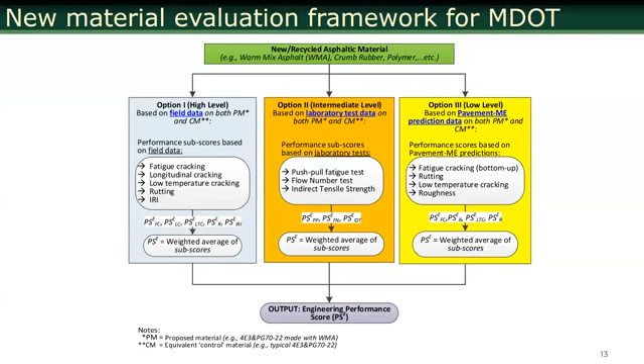So how do you address that? What we did is, okay, control material—you can still compare against control material, but we're going to run a whole bunch of tests on typical MDOT mixtures. So we ran typical MDOT mixtures, flow number, beam fatigue, those kind of data, and we come up with some kind of a baseline. So you compare against your control, but also at the end compare against the baseline mixture that shouldn't be too far off from a typical MDOT material. That's how we did this analysis.

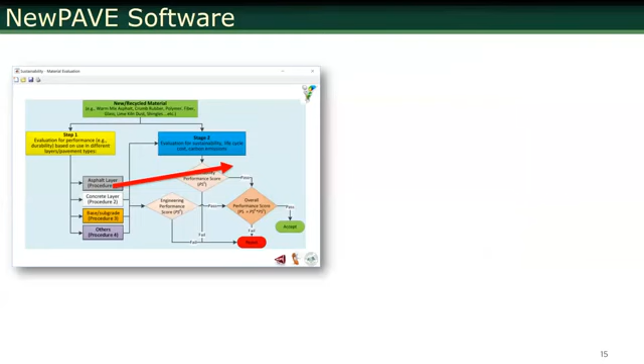Anyway, so after the performance analysis, then what we have is this asphalt layer. If you look at this, the way it goes is once you run the pavement ME, you have predictions of fatigue cracking, thermal cracking, and rutting, and the performance score is calculated and analyzed based on all three.

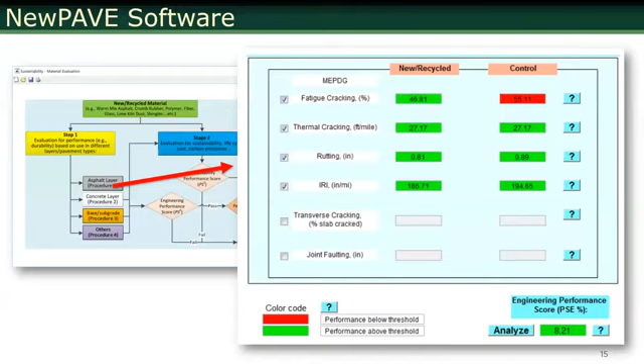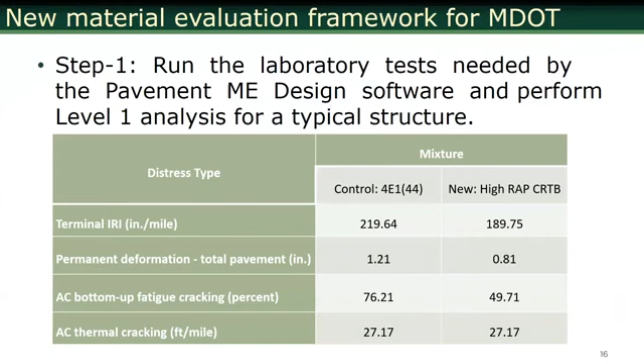The way it works is like, here's an example. Let's say you run laboratory tests by the pavement ME design for level 1 analysis, and let's say you got these numbers. Then your performance score is based on the distress of your control material minus the distress of your proposed material, divided by the distress of the typical MDOT mix.

So this is essentially your performance score. And these typical distresses for the MDOT mixtures—we come up with some distresses for typical structures, a few typical structures, and this is how we come up with that performance score.

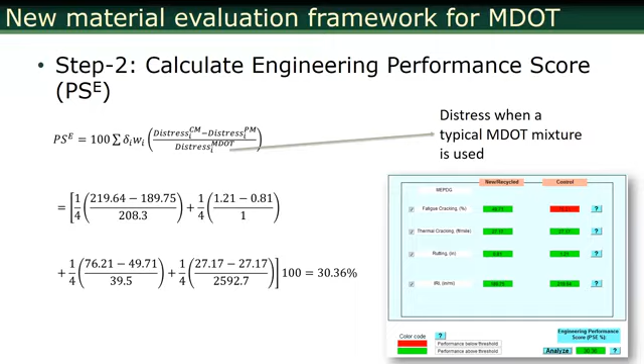And once you get a performance score, then that performance score goes into the life cycle analysis in phase 2. And that phase 2 life cycle analysis is really based on present value analysis. So let's say if the proposed material has a performance score of 50%, meaning it's 50% better than the control material.

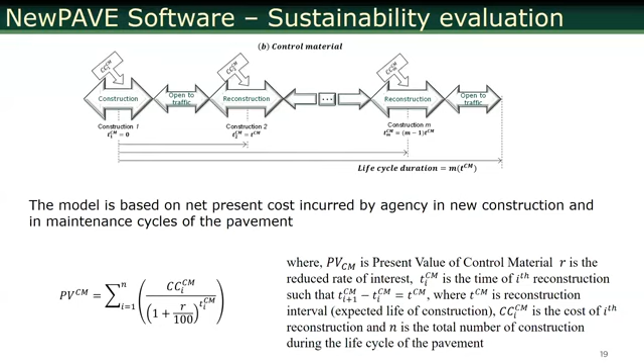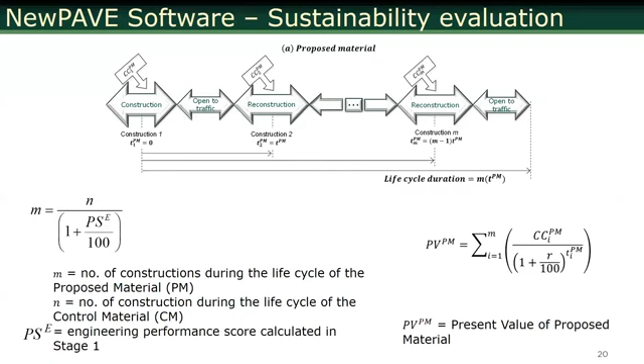So you look at, let's say, a 100-year life cycle duration, and see how many times within that 100 years you would do a reconstruction, and start calculating the costs of reconstruction over 100 years, how many times that's going to happen. The proposed material, depending on how much better it is, for a 100-year period, you will have maybe fewer reconstructions. Because of that, you calculate a present value, and you compare the net present value of the proposed material against the net present value of the control material. All this is based on Pavement ME analysis.

Eventually you get an engineering performance score and a sustainability performance score. Sustainability isn't just cost, there are also environmental effects like carbon - it's quite lengthy to explain everything. But the bottom line is, PME is a key engine in evaluating a new material and deciding whether to use it in pavements or not.

So when you look at a performance score of 8, what you're seeing in this particular example is essentially saying, overall, considering sustainability, life cycle cost, and performance, the new material is 8% better than a typical material. So it's good, it's not worse - you can try it, maybe it's going to work. Remember, this includes the cost and everything, so you shouldn't be asking about the cost, because it's in there - that's life cycle cost. The initial cost, the reconstruction, everything is in there.

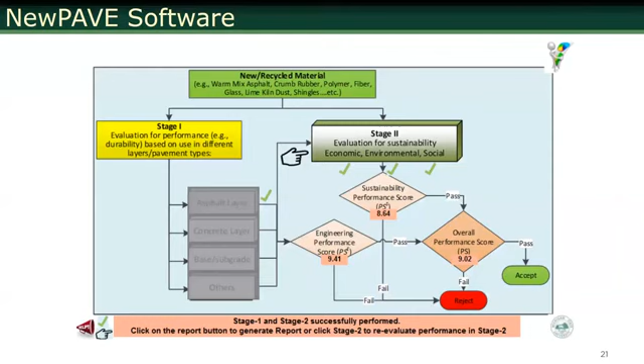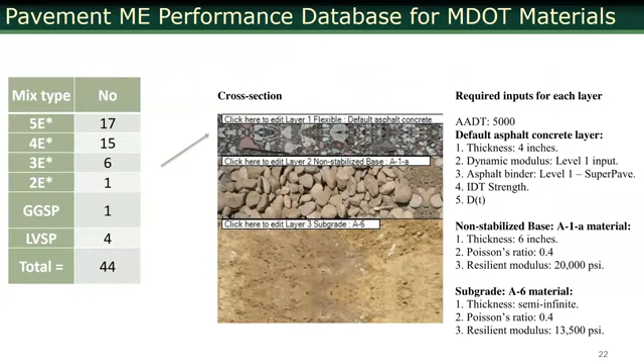While developing this software, we looked at one of the structures, evaluated multiple different mixes, ran a whole bunch of tests, and ran simulations on this type of structure. There was a 4-inch thick asphalt, and we kept varying the mixture type on this 4-inch asphalt, and we saw some interesting results. Again, this was a very limited study, not very extensive, and there's really no guarantee that 9% better is going to work in every single project, structure, and climate. So it's just an initial pass/fail type of analysis, but this is an interesting slide, I believe.

So we just grouped - we analyzed 44 mixes and grouped them based on design ESALs, these are 4E1 through 4E3. And what we've seen is for rutting, there's some variability here, but typically as you go higher in traffic level, you get less and less rutting, which is kind of expected. As you go to higher traffic level for 3E mixes, you get less and less rutting.

And for 5E mixes, you get less rutting from 3 to 30 mixes, but we got some unexpected results from 0.3 to 3 mixes - we would have expected them to have more rutting than the others. But perhaps in this particular case, the binder effects are dominant. Remember, when you go from E3 to E30, as you increase the ESALs, you're really having a lot more interlocking and a lot more compression between the mixes. So the effect of that is shown here, but at lower interlocking levels, perhaps the binder is overcoming and there's not excessive rutting, which is good. That also shows that the overall Superpave system is working pretty well - the PG system is really not allowing excessive rutting, the binder property overcomes it.

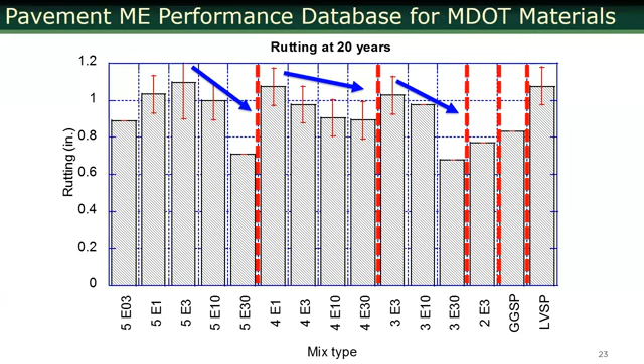This is only solely based on level 1 dynamic modulus inputs. The beta values we did not calibrate. So if you calibrate beta 2 and beta 3, you would get a more accurate picture.

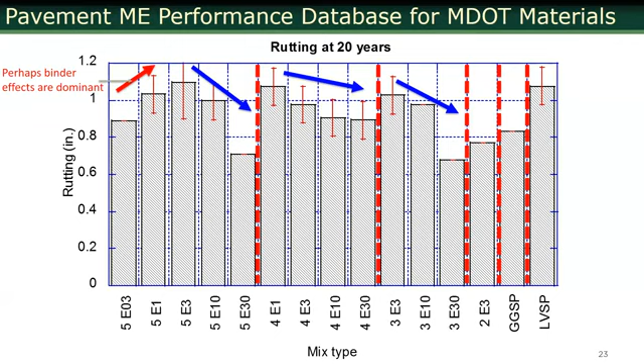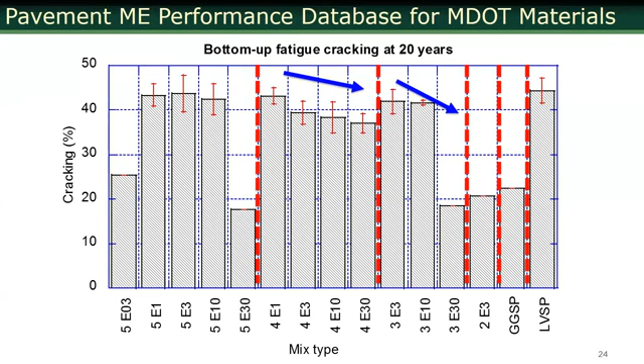This is just an example, showing you can do stuff like this to see the effect of different materials on compaction level. This is the cracking, similar results, cracking decreasing with higher level of traffic, and cracking decreasing again here. Not much difference between these three, but significantly lower cracking for 5E30.

So now for thermal cracking, we saw nothing. All the thermal cracking models were using a single K, so they were all predicting the same regardless of the mix type. This is the type of problem even MDOT was experiencing.

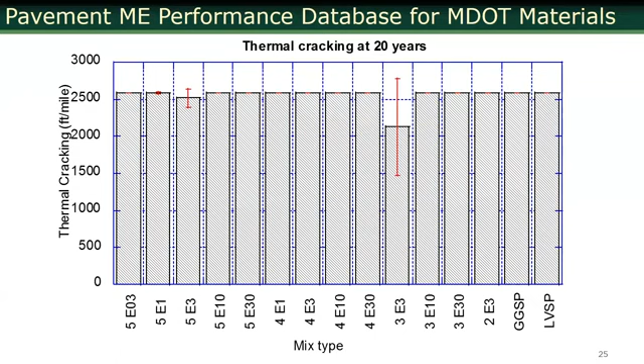All right, so, all right. So now. I already talked about this.

Material-level damage models were not calibrated. So what you've seen in the data so far, the differences are only due to the changes in the E star master curve and G star of the binders. Material-level damage models were not calibrated for the graphs I showed in the last 3 slides. So if you do that, you would probably have a better idea.

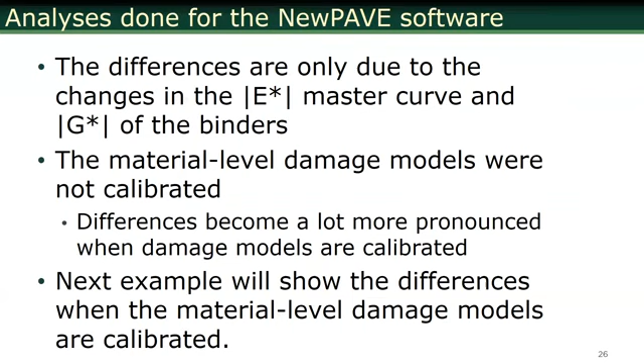Okay, so another example analysis that we've done. I'm showing you some examples of Pavement ME analysis that were useful. We had a study on evaluating different crumb rubber modified mixtures.

We had a control mixture with the 58-28 binder. We had a soft mixture. This is the Bennett road that we were studying. This is the crumb rubber terminal mixture, terminal blend, 58-28 plus 12% crumb rubber, produced by Seneca Petroleum. This was developed by ourselves, a wet process mixture, and this was a devulcanized rubber modified mixture that we looked at.

So we've done a whole bunch of testing for all these 5 different mixes. The idea was which one is going to perform better for a specific case. We had a certain structure in mind, and wanted to see which one would perform better and worse.

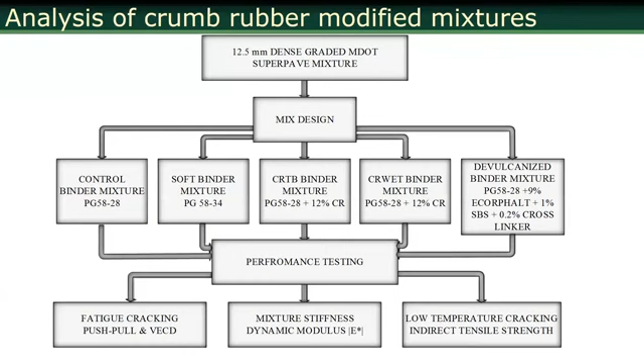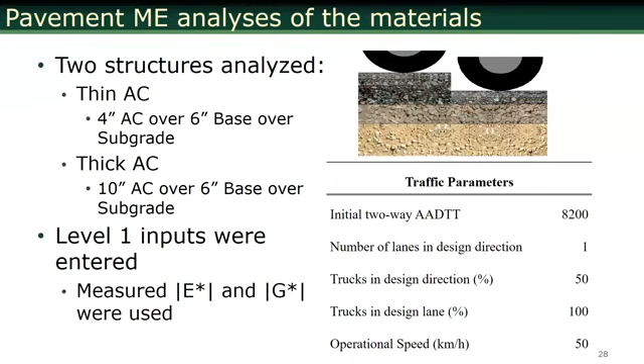So we looked at a thick structure and a thin structure. Our thin structure was a 4-inch AC over 6-inch base, and our thick structure was a 10-inch AC over a 6-inch base. We used level 1 inputs for all E star and G star, measured for all 5 different combinations of materials, and used the same traffic level.

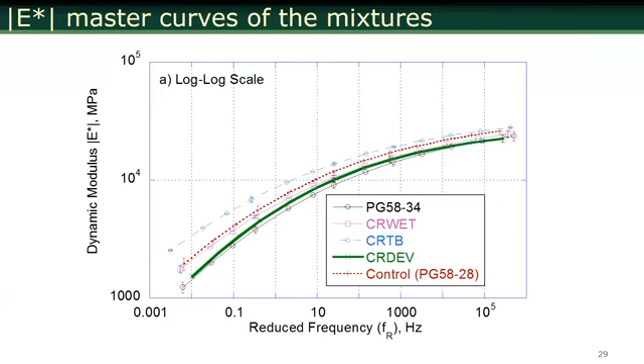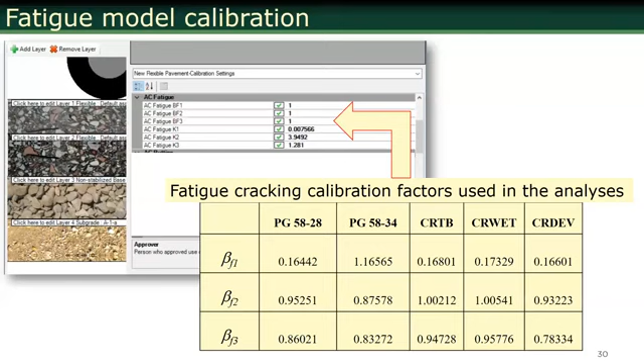So we input these into Pavement ME, and also calibrated the fatigue model for each individual mixture. We ran fatigue tests for all of these mixes in the lab, and then came up with beta factors for individual mixtures, which we then entered into Pavement ME. And this is...